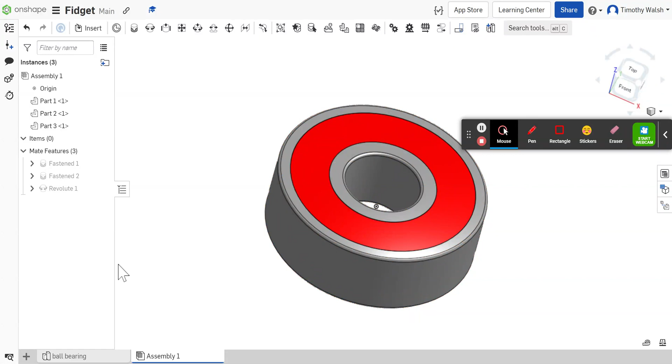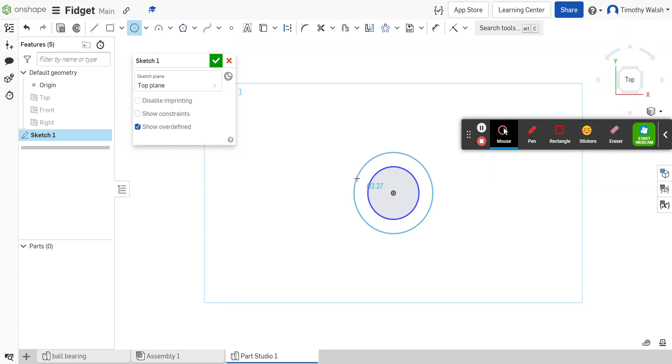First thing you do is just draw some circles. So you get the middle ring, there's a silver, there's another middle ring. Snap everything from the origin, and you don't have to dimension anything at this point because it's just outlining where it is.

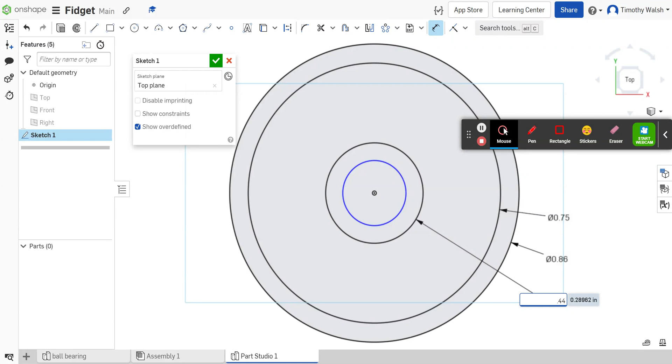Okay, then you have to dimension it. Get your dimension tool out. This outside ring is 0.86 - that is very important that you get right. Hit F to refocus it. This one is 0.75, so I nailed it. And this one is 0.44. You might have to get a caliper out and measure your ball bearing to make sure it's right. This is just the ball bearing that I'm using, 0.31. There we go, so those are the dimensions.

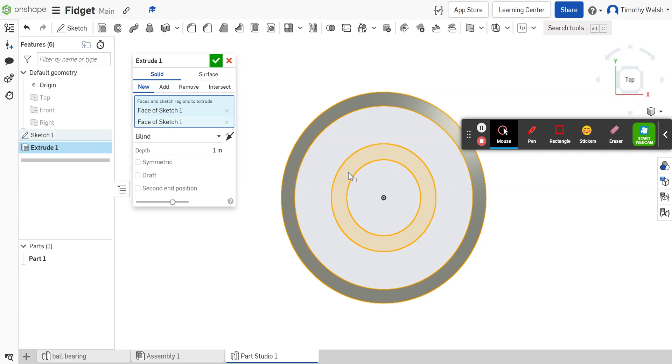Oh, looks pretty good, all right. Then extrude it. We're going to do a special kind of extrusion where we just extrude this ring and this ring, so it only does those middle rings. Then we're going to do a symmetrical, so it goes on both origins. I'm going to tell it 0.27, I think, is what my ball bearing is. So something like that, okay.

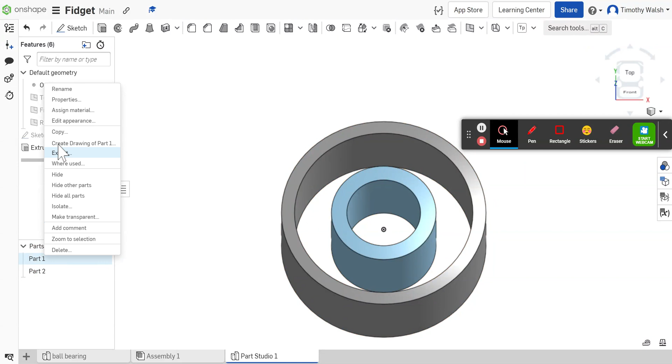Say check. Then those parts, I want these parts both to be the same color. So I'm going to edit the appearance of this one, make it more like a gray color. That's good. So I got two separate parts, which is actually how a ball bearing is.

And then I'm going to extrude this middle part. So here's the trick - see the sketch right here? You can turn on the visibility so I can see that sketch again, so that geometry is there. I can say extrude, click on that middle one, and then I'm going to do that one symmetrically as well.

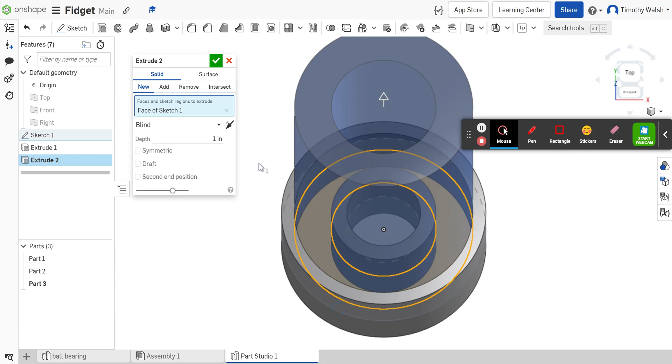I'm going to do it 0.269, just slightly smaller than the other one. Looks like I didn't do it right. Right, there it goes, there it goes. So there's a ball bearing.

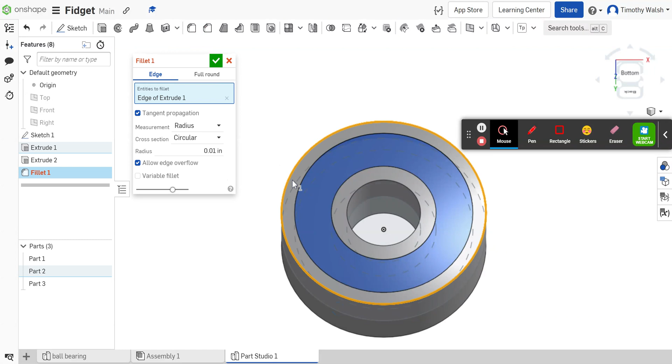Right, if you want to get real cute, you could add a fillet on the edge here, like a 0.01 fillet on the ring here, and probably here and here. All right cool, there you go, there's your ball bearing.

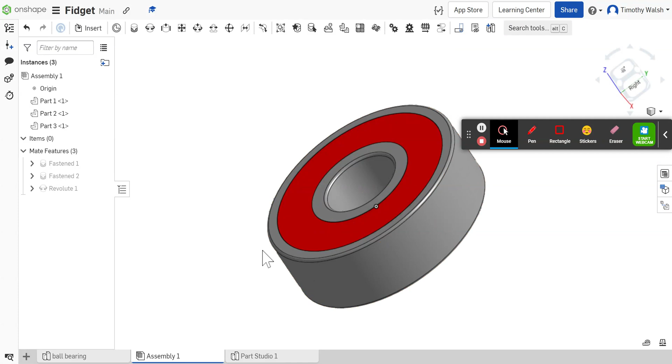Okay, now the ball bearing is three parts. We have to get those parts all to be together. So if you go to the assembly tab, looks like I've got one already put in here, so I'll just delete this out. Sorry, I should say new assembly, but if you go to assembly, there should be nothing there.

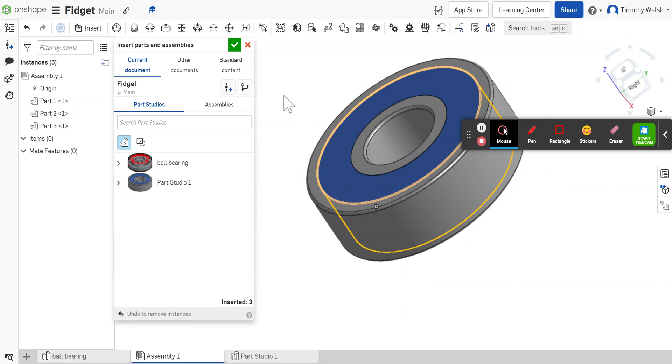And then you can say insert, and you can insert your ball bearing. So I got the one I drew already - here's the new one. I say ball bearing, insert it, and you'll see I can just insert it. I can insert as many ball bearings as I want now, but for the fidget spinner, I just need one. So I say check, okay.

Now, what's interesting is this ball bearing - it looks like it's all one part, but it's actually three parts. So I've got these three different parts, and I got to get these so they're all tied together and able to spin around each other. So to do that, this is the middle part, and this origin right here, I'm actually going to fasten that.

So this mate right here, fasten mate. If I turn that on, it's going to say fasten, and I'm going to fasten to that origin point. See that little circle appears.

Good, and then I'm going to fasten to the middle of this ball bearing. So you see there's a little trick. I can do the top, I can go down a little bit and get the middle, I go down even more and get the bottom. All right, so I want the middle, so this middle one right there, click on that.

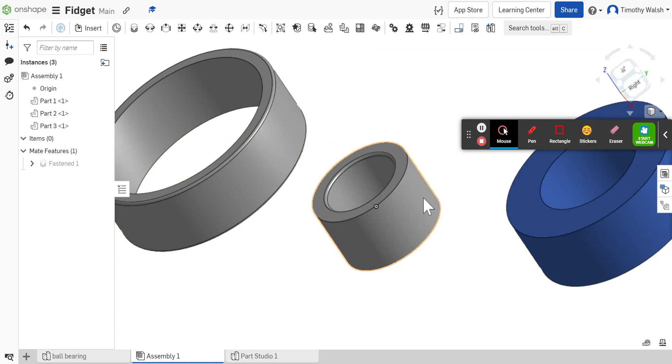Now it's fastened, all right, so it's checked. So now if I want to try to move this around, it will not move around. Where these I can still move, but this one is tied to the origin, it can't move around. So that's pretty good, that's just good CADing technique. Fasten your first part down.

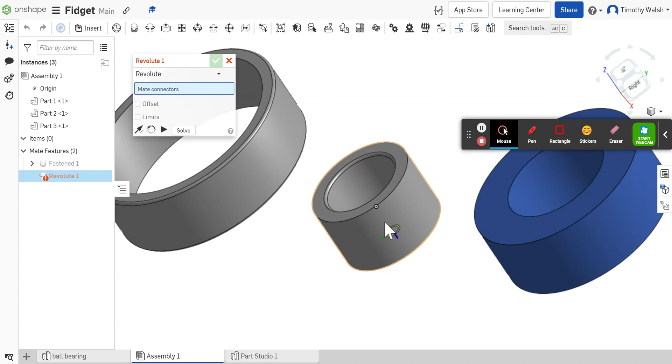Okay, now these other two, I want them to revolve around it. So I'll do the revolute mate, and I'll say that middle tab, so not the top, not the bottom, the middle. All right, so the middle one, and then this one middle also, not the top, I'm gonna go down to the middle, and I'll revolve those two together.

So now it looks like it's going the wrong way, so I'll go the other way. See, I missed it, so that's fine, I'll just X out of there. I missed it somehow, try again.

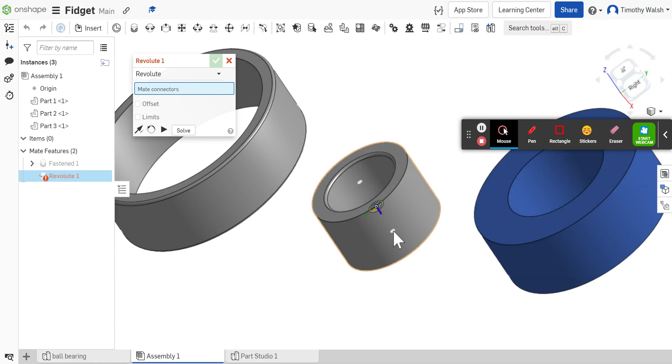Revolve, I gotta get this middle one. Sometimes it helps if you turn it. There's that revolve mate, and here's this revolve mate. There you go, that's better. I don't know what this is, but that's how you do it. Yeah, that's a much better way of doing it.

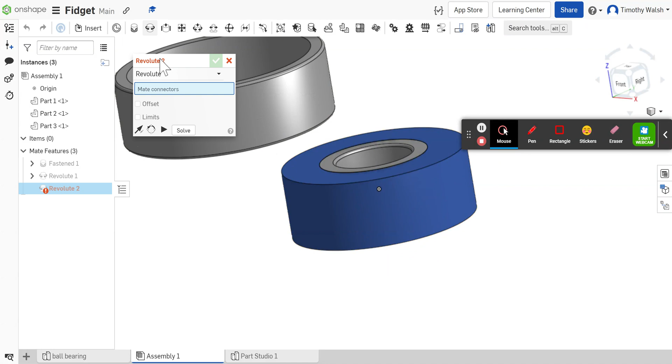I can say check, and I can do the same thing. Now this can go around here, this can go around here, and I can say revolve mate. I could say this middle one, and we really get it in the middle. You can really see this mate right here, and you move this out of the way. And this revolve mate there. And I can say check, and now they are all together around it.

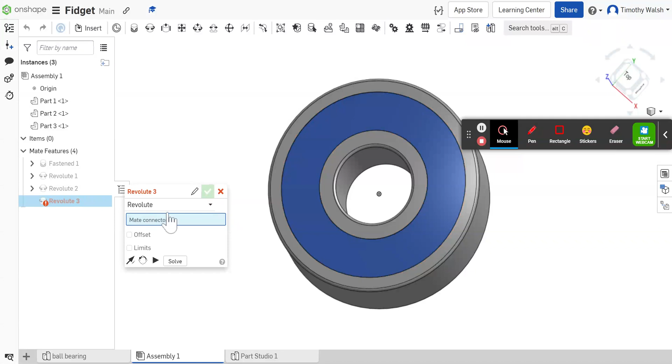Okay, yeah, so that's pretty good. The only thing left to do now is to go make another part studio. So make a part studio, and draw the body of my fidget spinner. So I do here, I'll just do a real simple one. I'll just draw a circle fidget, right, it'll be real simple.

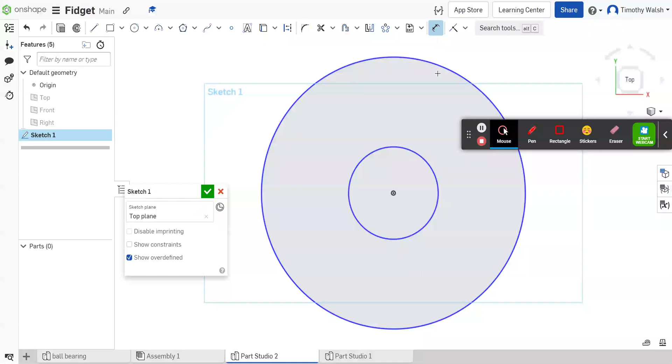So there's a circle, there's a circle. Put some dimensions on here. This has to be 0.86. And this one cannot be bigger than 3.5, so I'll say 3, not 3 inches, 3.25, right, and I can say check.

And I can go and decorate this however I want. If I extrude this up, I extrude it up, and extrude it 1/4 of an inch, so 0.25. There we go, there we go. All right.

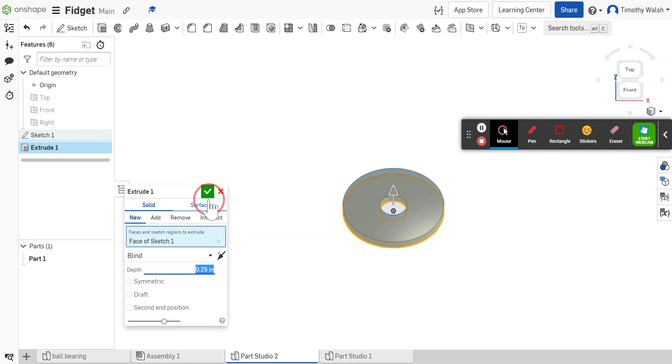Not sure what I did wrong. So something happened here, so sketch, extrude, 0.25. There you go, there you go.

All right, then you can go back to your assembly, and this is cool. I can say insert, and I can insert the part studio. Something like that, insert that, and then I can insert some of these together.

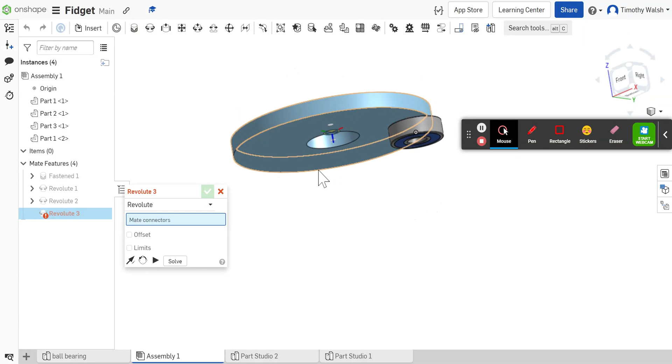One thing is, it's kind of tricky, I can't really see if this moves, but oh well. So insert this, get the center point of this guy. So the center revolve, that guy, around the center of this one, revolve. And now they're totally tied together.

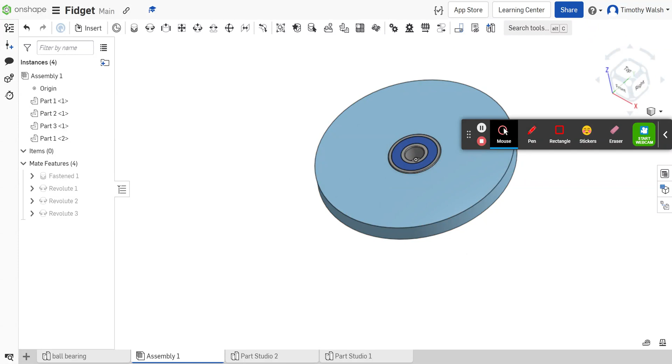And now if I spin this around, this will spin around, which you can't tell because it's a circle. But if I had like little shapes around here, it'd be really cool to be able to see it. So, yeah, all right, good luck.